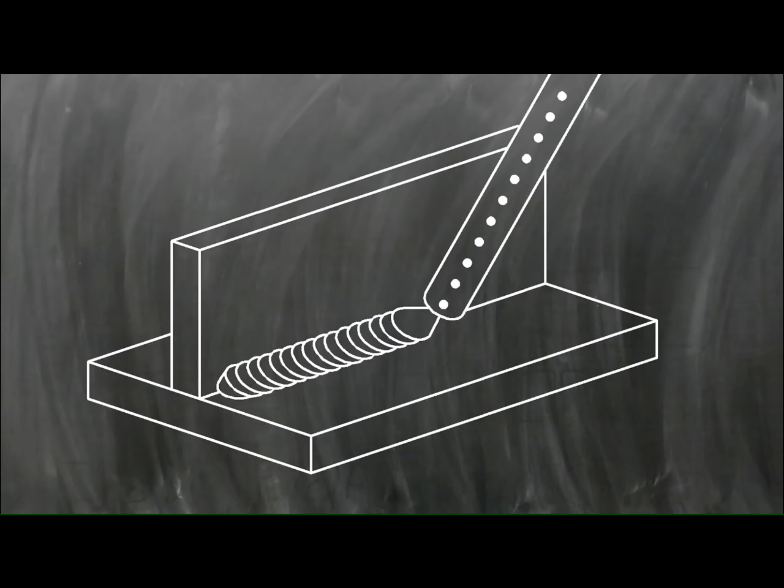In stick welding, an electric current flows through a metal electrode or stick. An arc forms between the end of this electrode and the workpiece. The arc melts both the metal in the rod and the metal in the pieces to be joined. The metal from the electrode is ejected into a molten weld pool and mixes or coalesces with the workpiece.

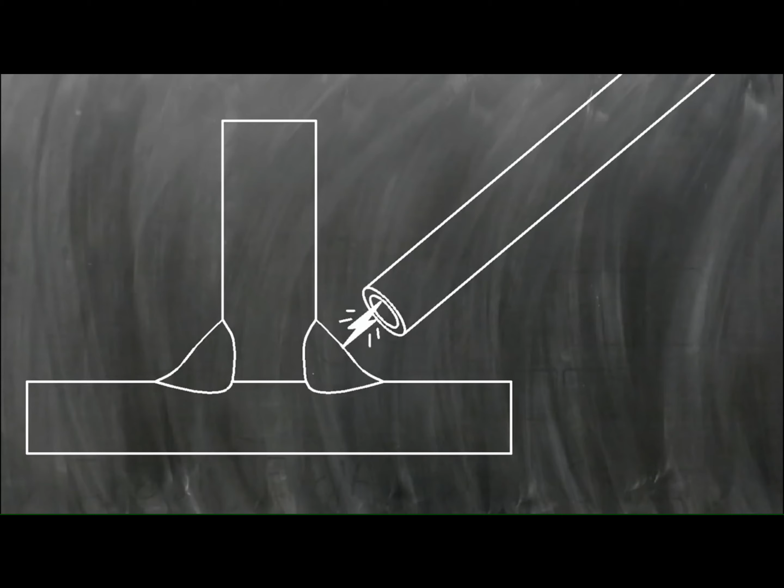The metal in the workpiece is called the base metal, and the metal added to the joint from the electrode is called filler metal. Stick welding always adds filler metal to the joint.

Because the electrode is constantly melting away and becoming part of the welded structure, stick welding is known as a consumable electrode process. As the electrode is heated by the arc, some of the covering releases protective gases that shield the weld and help stabilize the arc.

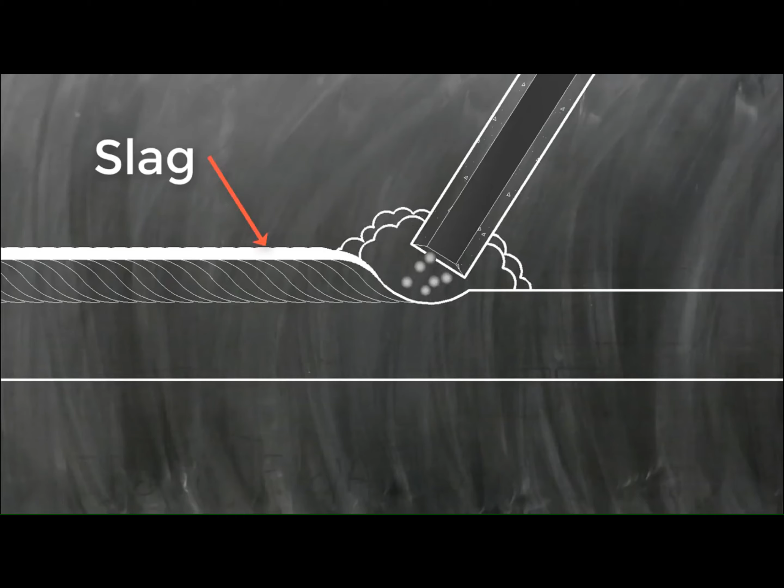The remaining covering melts and covers the molten weld pool with a protective slag layer. This slag layer protects and helps shape the weld as it solidifies, but it must be removed when the weld is cool.

Since the gases generated by the flux covering are able to completely protect the molten weld, there is no need for other shielding equipment such as high-pressure gas cylinders, regulators, or hoses.

Compared to other welding processes, stick welding equipment is often very simple. Sometimes the only controls on the machine are current and polarity.

Many important welding variables come from how the person doing the welding positions and moves the electrode. For this reason, the quality of welds produced by this process depends greatly on operator skill.

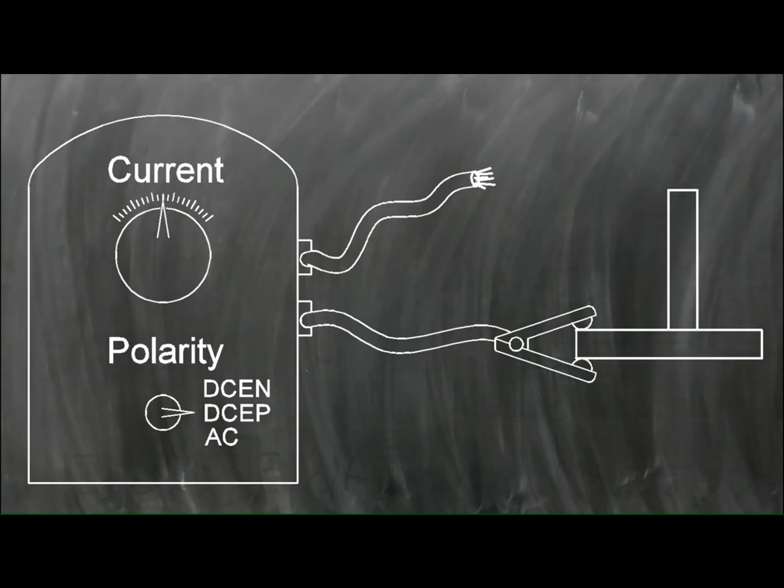In stick welding, two insulated wires are connected to the welding machine. One lead goes to a clamp, which is connected to the work. This is called the work lead. The other wire goes to an electrode holder. The uncovered or grip end of the electrode is placed into the electrode holder.

The polarity of the welding setup refers to how the electricity flows from the machine to the workpiece and back. The current will either be AC or DC. In AC, or alternating current, the direction of the flow of electricity changes many times every second.

Direct current, or DC, is like the flow of electricity from a car battery. One lead is always positive and the other is always negative.

DC can be set up two ways in stick welding. One way to connect DC is DCEN, or DC electrode negative, often called straight polarity. In DCEN, the electrode is connected to the negative terminal and the work is connected to the positive.

The other way to connect DC is DCEP, which is DC electrode positive, often called reverse polarity. Many stick welding electrodes operate on DCEP, but some are designed to work with DCEN or AC, so check the manufacturer's recommendations for the proper settings.

Stick electrodes are made with a variety of metal alloy compositions and flux chemistries. You'll want to make sure the electrode you plan to use will be strong enough and compatible with the base metal and the position of the joint you want to weld.

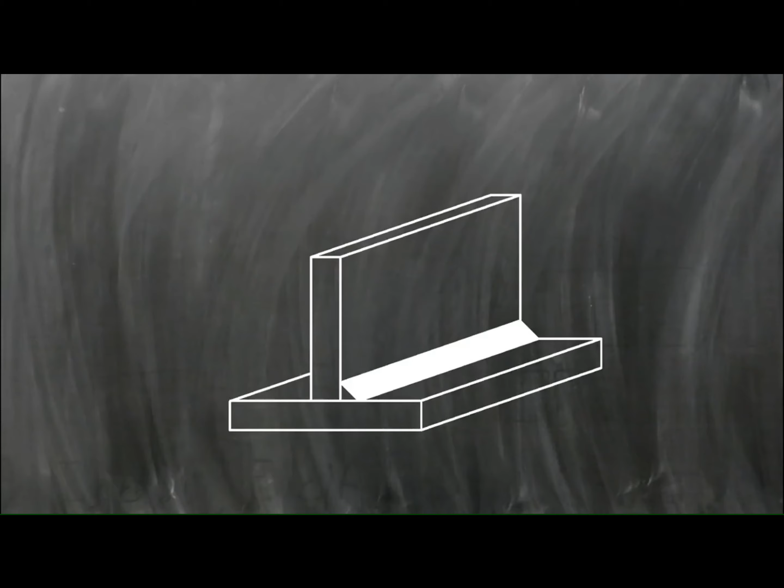Often, electrodes have the American Welding Society classification code printed on them. This code will identify tensile strength, the flux covering type, the appropriate welding positions, and sometimes other important information.

So, in summary, stick welding is an electric arc welding process. It uses a consumable electrode rod that is covered with a flux material. When heated, the flux releases shielding gases that protect the weld.

A layer of slag covers the weld while it solidifies and is removed when the metal cools. Stick electrodes are not all the same and must be chosen for the specific job they need to do.

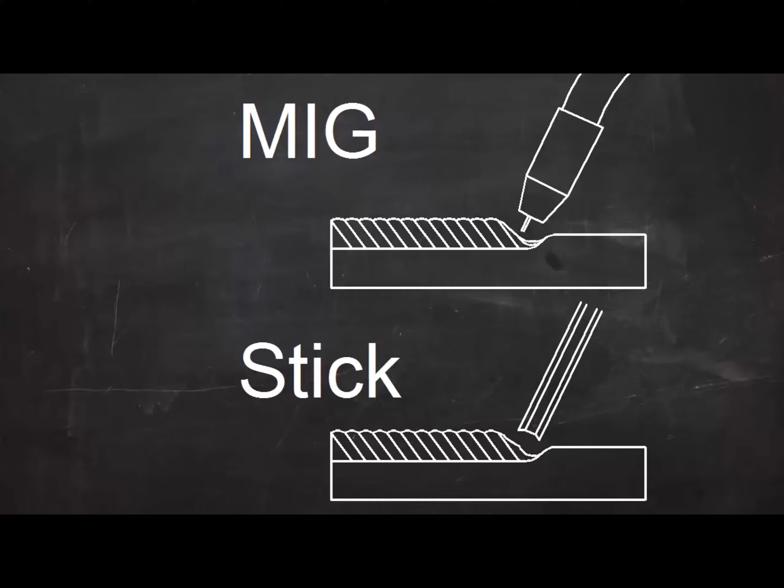TIG works by melting the base metal, the metal that makes up the two pieces to be joined. The heat is generated by an electric arc that forms between the base metal and the tungsten electrode. You can control the amount of heat with a foot pedal or with a thumb wheel on the torch.

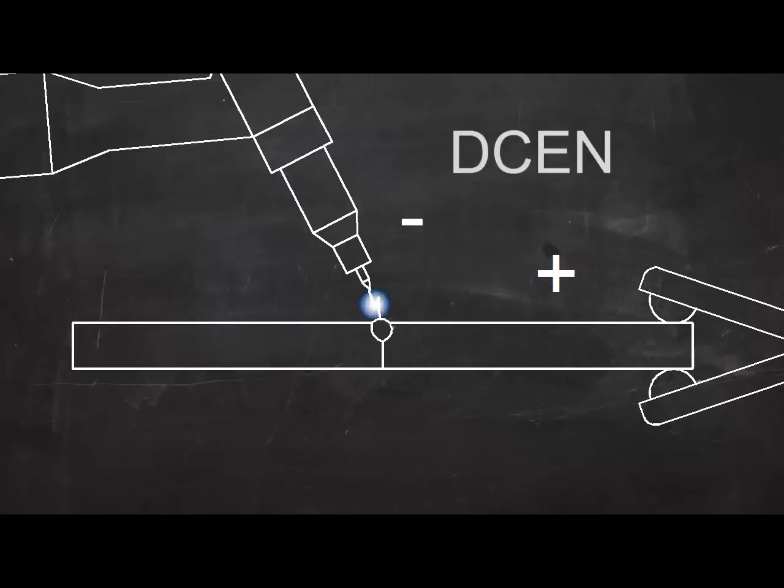For most metals, the current is direct current, or DC. DC is like the current flowing from a car battery. One wire is always negative and one is always positive. In DC TIG welding, the electrode is usually negative and the workpiece is positive. The term DCEN is used for this, indicating that the current is DC and the electrode is negative. This is also called straight polarity, but DCEN is a more descriptive term. DCEN puts most of the heat on the workpiece, and it's the most common setup.

When welding aluminum, however, AC is used. In AC, the positive and negative voltages switch back and forth between the electrode and the workpiece. This puts more heat on the electrode, but it has a cleaning effect on the workpiece. Aluminum forms oxides that float to the top of the weld pool and prevent a good weld. AC current helps control these oxides.

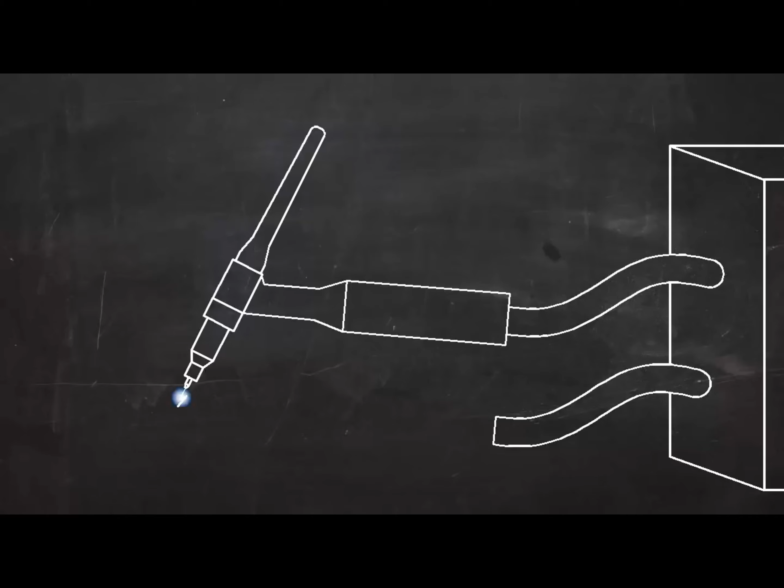In an electric circuit, the current flows in a loop. In TIG welding, the current has to flow in a complete circle from the machine to the torch, into the work, and back to the machine. A work lead is clamped to the work to complete the circuit from the workpiece back to the machine.

You can TIG weld with or without filler metal, and that's not a choice you have in a lot of other processes. If you want to add filler metal to a TIG weld, use a filler rod, which is just a rod of metal with a specific alloy. You want to make sure that the filler metal you're using is compatible with the base metal and that it has the strength required to do the job.

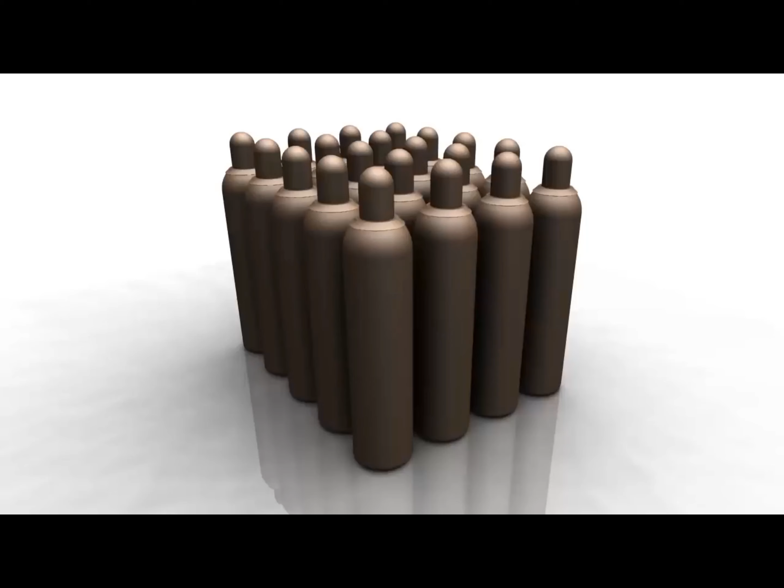In TIG welding, the molten metal is protected by a shielding gas. This gas, usually argon and sometimes helium or other gases, keeps the molten metal from reacting with oxygen and water vapor in the atmosphere. This shielding gas is stored in high-pressure cylinders like these. The pressure is reduced to a usable level by a device called a regulator. The shielding gas flows through a hose and comes out right at the point of the weld.

So in summary, TIG welding is an electric arc welding process, uses a non-consumable tungsten electrode, the filler metal is added separately in the form of filler rod, and the shielding gas comes from a high-pressure cylinder.

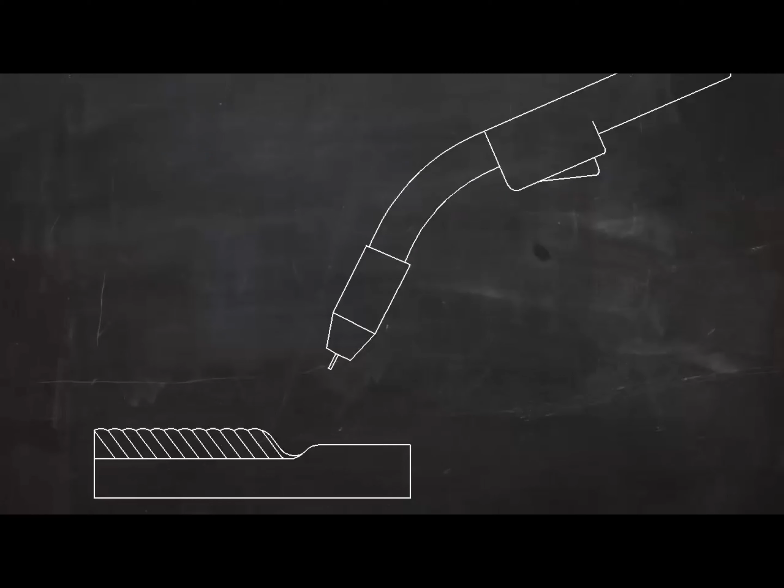In MIG welding, a thin wire acts as the electrode. This wire is fed from a spool mounted on a gun or inside the welding machine through a flexible tube and out of the nozzle on the welding gun or torch. The wire is fed continuously when the trigger on the welding gun is pulled. When this trigger is pulled, it also switches on the welding current and a shielding gas.

An electric arc forms between this wire electrode and the workpiece and heats both metals above their melting point. These metals mix together, or coalesce, and solidify to join the workpieces into a single piece. The metal in these parts to be joined is called the base metal, and the metal that comes from the melting wire electrode is called filler metal. MIG welding always adds filler metal to the joint. Because the wire electrode melts as it's being used, MIG is called a consumable electrode process.

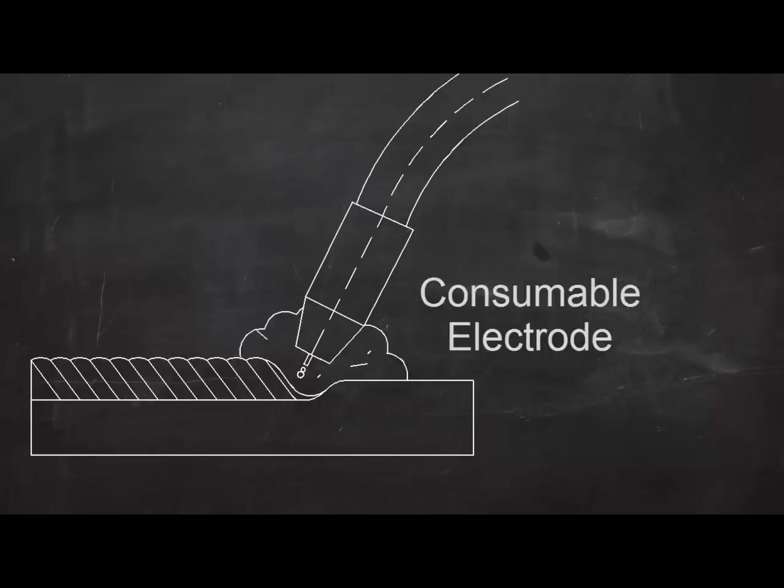In MIG welding, all the machine controls are set on the machine itself. The most important of these are polarity, wire speed, and voltage. The trigger on the gun is just an on-off switch.

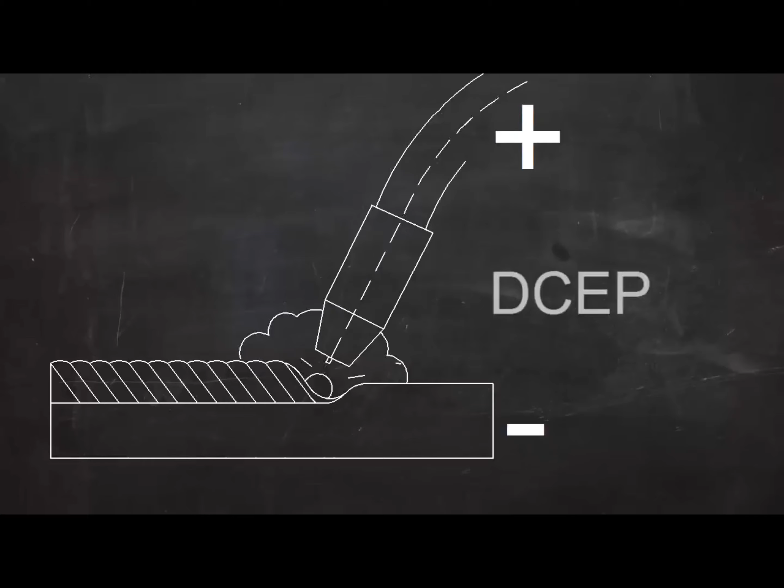For most MIG welding, the current is direct current, or DC. DC is like the current flowing from a car battery. One wire is always negative, and one is always positive. In DC MIG welding, the electrode is usually positive and the workpiece is negative. The term DCEP is used, indicating that the current is direct current and the electrode is positive. This is also called reverse polarity, but DCEP is a more descriptive term.

In an electric circuit, the current flows in a loop. In MIG welding, the current has to flow in a complete circle from the machine to the torch, into the work, and back to the machine. A work lead is clamped to the work to complete the circuit from the workpiece back to the machine.

So, in summary, MIG welding is an electric arc welding process. It uses a consumable wire electrode. Filler metal is added automatically, and the shielding gas comes from a high-pressure cylinder.

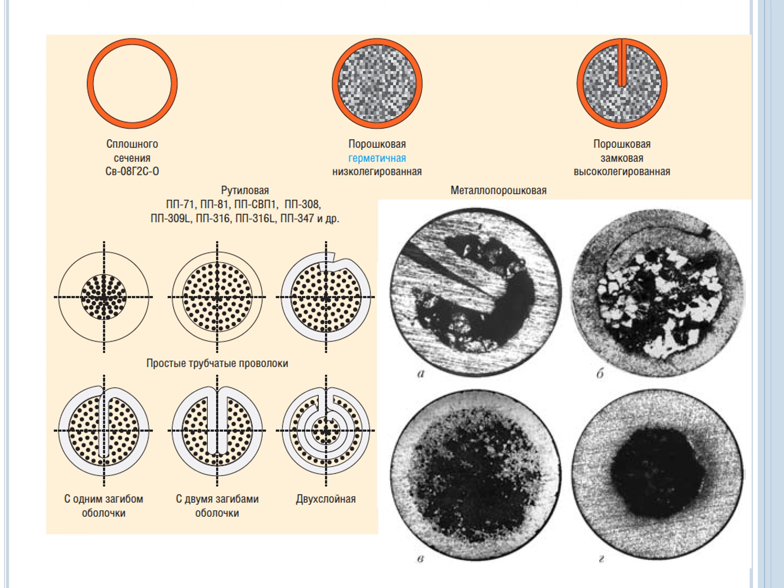What is flux core welding? Flux core is an arc welding process that uses a tubular wire electrode with a flux-filled inner core. The American Welding Society calls this process flux cored arc welding, or FCAW. All flux core welding is done on equipment that is similar to, and sometimes identical to, the equipment used in MIG or gas metal arc welding.

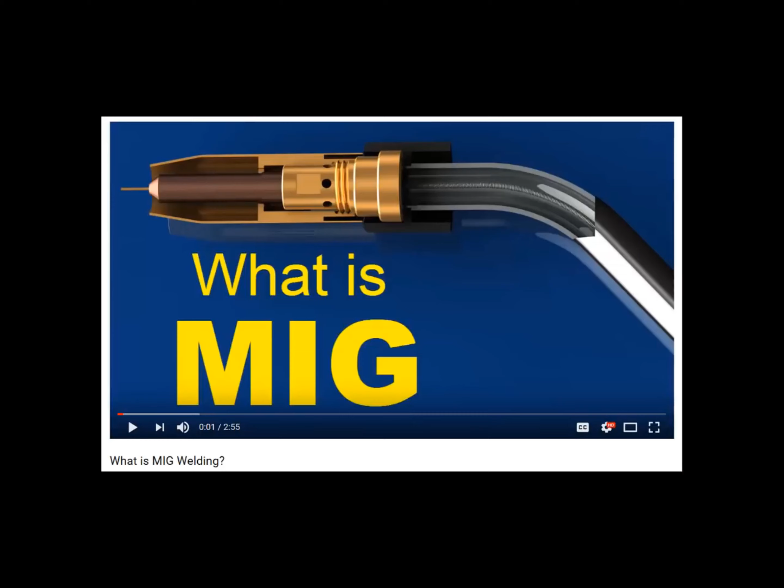If you're not familiar with MIG welding, you might want to watch our What is MIG Welding video before continuing. But you should understand that flux core welding has some important differences from MIG welding.

In flux core welding, the wire electrode is fed through a wire feed unit. Usually, this wire feeder requires knurled rollers that can grip the tubular wire without flattening or damaging it. As in MIG welding, an electric arc forms between this wire electrode and the workpiece. This arc heats both metals above their melting point. These metals mix together or coalesce and solidify to join the workpieces into a single piece.

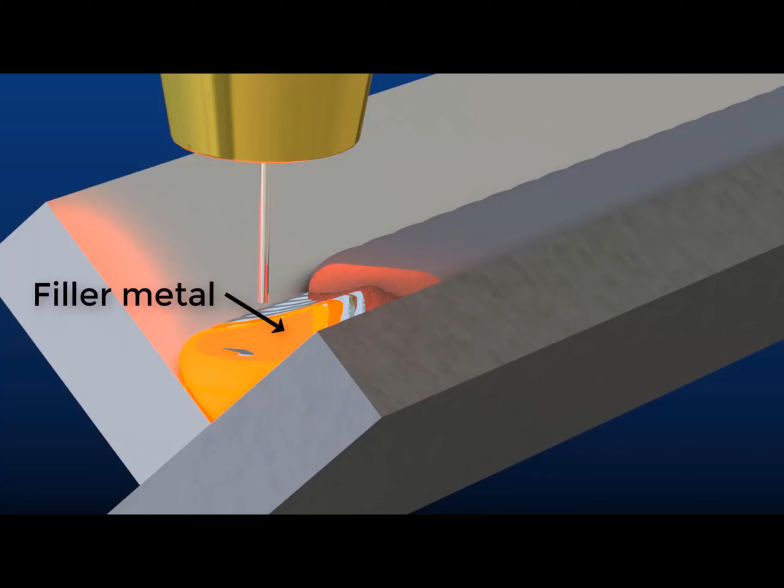The metal in the parts to be joined is called the base metal, and the metal that comes from the melting wire electrode is called filler metal. Because the wire electrode melts as it's being used, flux core is called a consumable electrode process. Flux core welding always adds filler metal to the joint.

The job of the flux inside the electrode depends on which type of flux core process it was designed for. There are two main types of flux core arc welding: self-shielded, known as FCAW-S, and gas-shielded, known as FCAW-G. You need to be sure you're using the wire in the way that it was designed to be used, because the chemistry behind these two processes is different.

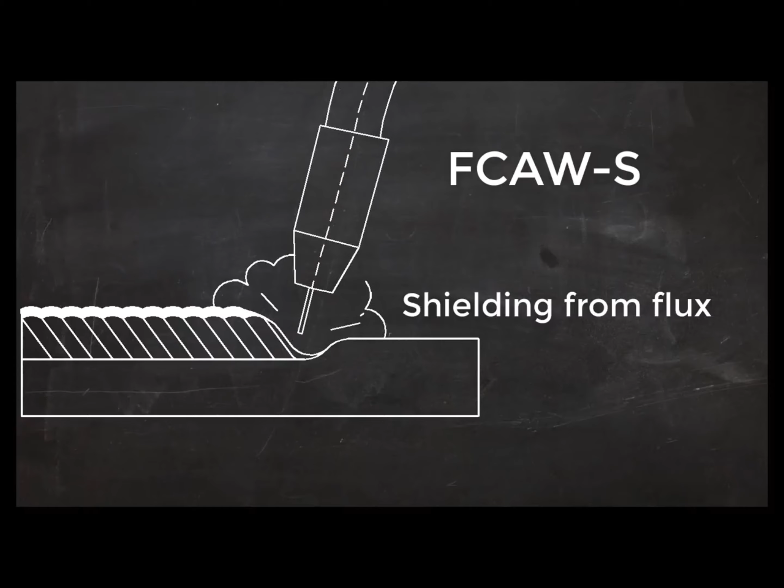Flux-cored electrodes that are designed to be self-shielded contain a flux that completely protects the molten weld pool. The flux in these electrodes creates a protective cloud that prevents gases like nitrogen and oxygen from reacting with the hot metal. One advantage of the self-shielded flux core process is that the added cost and inconvenience of gas shielding equipment is eliminated. Also, self-shielded electrodes are less sensitive to drafts and breezes that easily contaminate gas-shielded processes like MIG welding. This can be a real advantage in some applications.

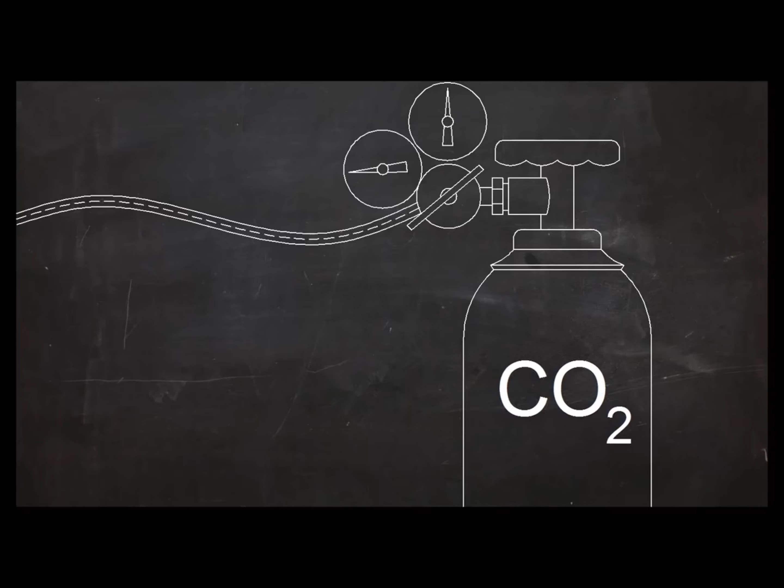Electrodes designed to be gas-shielded rely on a secondary shielding gas to do the job of protecting the molten weld. The high-pressure gas cylinders used for this process are of the same design as those used in MIG or TIG welding. These cylinders contain gas under extremely high pressure, and a device called a regulator brings the gas to a usable pressure. One of the most common gases used to shield flux core is pure CO2. Other gases, such as CO2 argon blends, are also used. But one advantage of flux core G is that low-cost CO2 can be used to shield the weld.

Another benefit of gas-shielded flux core is the high deposition rate that can be achieved with the combination of flux and gas. Gas-shielded flux core has the ability to lay down metal at an extremely fast rate. In both the self-shielded and gas-shielded processes, the flux forms a thin layer of slag that protects the weld as it cools. This slag also helps the solidifying weld to take a consistent low-profile shape.

In flux core welding, all of the machine controls are set on the machine itself. The most important of these are polarity, wire speed, and voltage. The trigger on the gun is just an on-off switch. For most flux core welding, the current is direct current, or DC. DC is like the current flowing from a car battery. One wire is always negative and one is always positive.

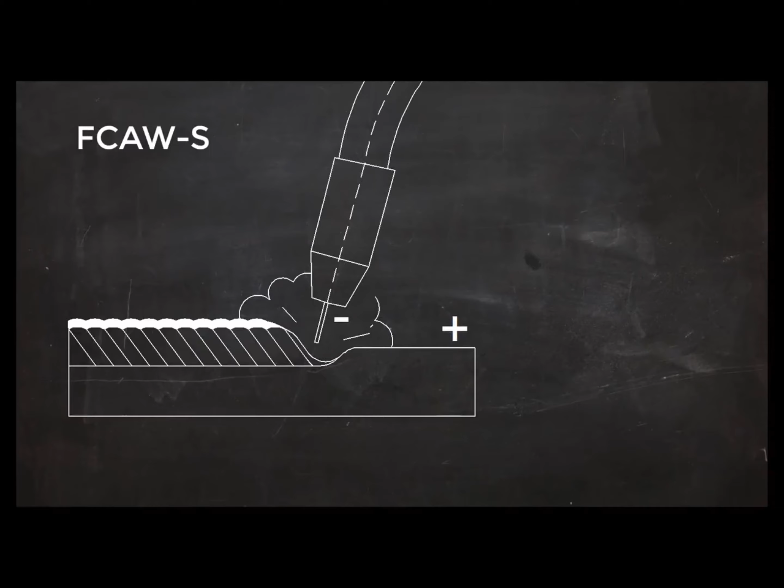In self-shielded flux core welding, the electrode is usually negative and the workpiece is positive. The term DCEN is used for this, indicating that the current is DC and the electrode is negative. You might also hear this called straight polarity. In gas-shielded flux core welding, the electrode is usually positive and the workpiece negative. The term for this is DCEP, indicating that the current is DC and the electrode is positive. This is also called reverse polarity, but DCEP is a more descriptive term.

Keep in mind that these are the most common settings, and always check your manufacturer's recommendations. In an electric circuit, the current flows in a loop. In flux core welding, the current has to flow in a complete circle from the machine to the gun, into the work and back to the machine. A work lead is clamped to the work to complete the circuit from the workpiece back to the machine.

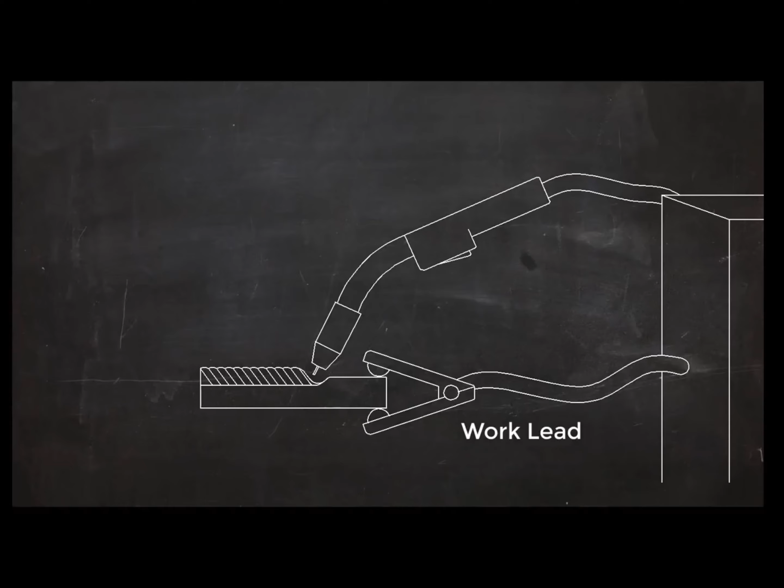So in summary, flux core is an electric arc welding process. It uses a consumable tubular wire electrode that contains flux material on the inside of it. Filler material is added to the weld automatically as the wire electrode melts. In self-shielded flux core, the weld is protected by the flux itself. And in gas-shielded flux core, the shielding gas comes from a high-pressure cylinder.